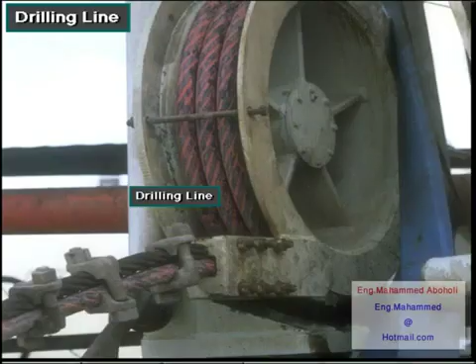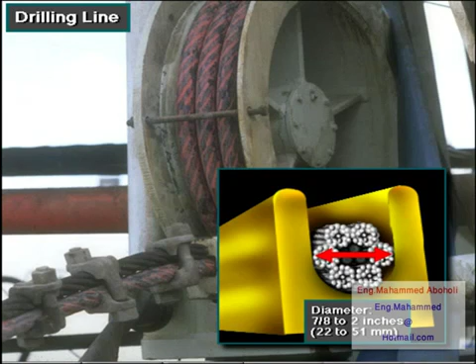Drilling line is high-strength, heavy-duty wire rope. The manufacturer braids several wires together to form the rope. Drilling line comes in diameters ranging from 7/8 of an inch to 2 inches, about 22 to 51 millimeters.

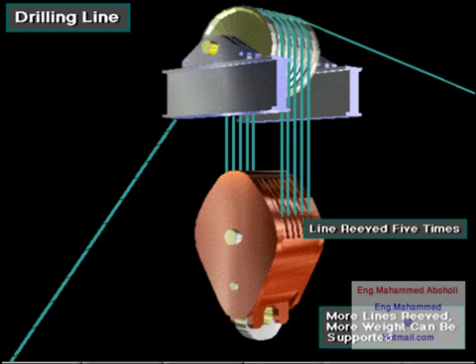Crew members string or reeve drilling line between the crown block and the traveling block. The more lines they reeve, the more weight the system can support. Here, for example, they reeve the line 5 times between the blocks, so that 10 lines support the traveling block.

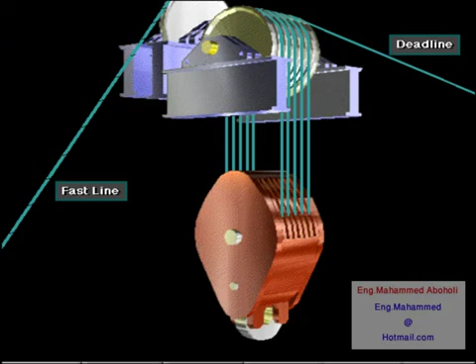Here's the crown block and traveling block strung together by drilling line. Note how the traveling block goes up and down as the driller takes in or lets out drilling line. The dead line is drilling line that runs to the dead line anchor. The fast line is drilling line that runs to the drawworks.

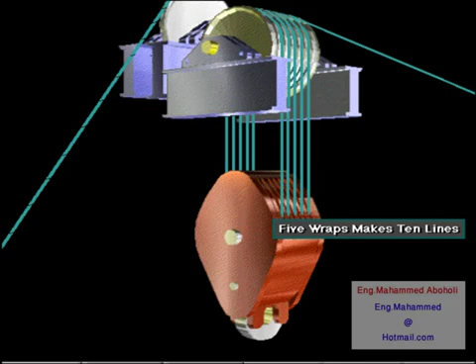Notice the 5 wraps of drilling line between the crown and the traveling block. 5 wraps makes for 10 lines. 10 lines can lift 10 times the weight of a single line. Also notice that the crown block has one more sheave than the traveling block. This extra sheave is for the fast line.

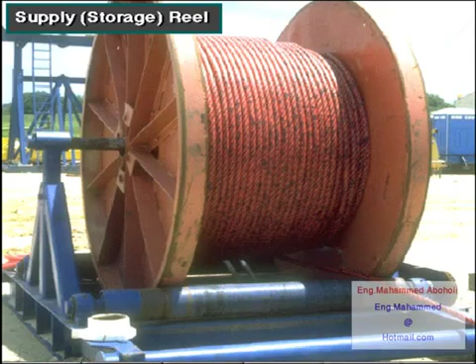Drilling line comes to the rig on a large supply reel. Normally, crew members string the needed amount of line through the traveling and crown blocks and onto the drawworks. Then, they keep the extra line on this supply reel. The reason they keep the extra line is for a slip and cut program.

As the driller raises and lowers the traveling block and its associated loads, the drilling line wears. It tends to wear more where it passes over the traveling block sheaves and the crown block sheaves. The line has to bend around the sheaves, and this puts extra stress on it.

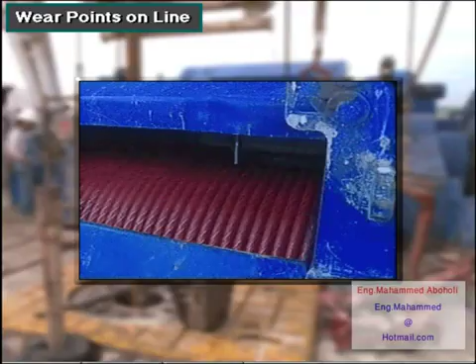The line also wears more where it reaches the end of the drawworks drum. It has to reverse direction here and start back the other way on the drum. This direction change puts extra stress on the line.

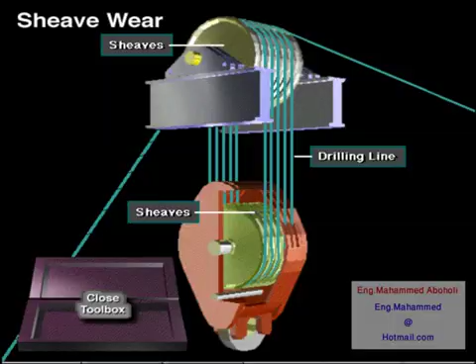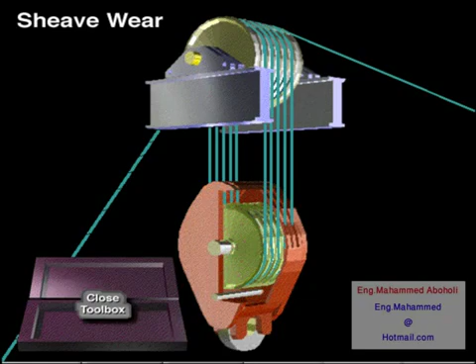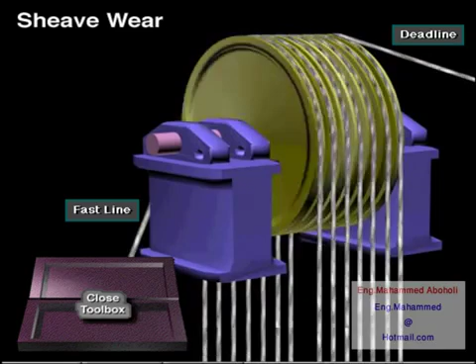Not only does the drilling line wear, but the sheaves do also. One thing that the crew does to prolong the life of the sheaves is to rotate the traveling block 180 degrees. During operation, each sheave moves at a different speed. The one closest to the fast line moves the fastest, and the one closest to the dead line moves the slowest. Since the faster-moving sheaves wear quicker, the wear can be distributed evenly among the sheaves by rotating the traveling block periodically. This is often done between wells.

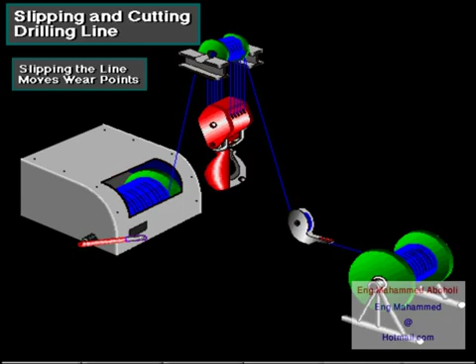To distribute the wear on the drilling line, the crew slips the line a predetermined amount. Slipping the line moves the wear points on the line. To slip the line, crew members lower the traveling block to the rig floor. They then rig up a special hang line from the crown beam to the top of the traveling block. The hang line keeps the block from moving.

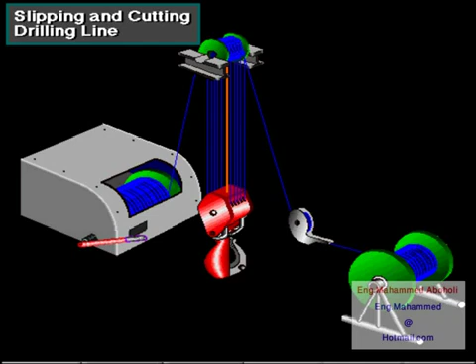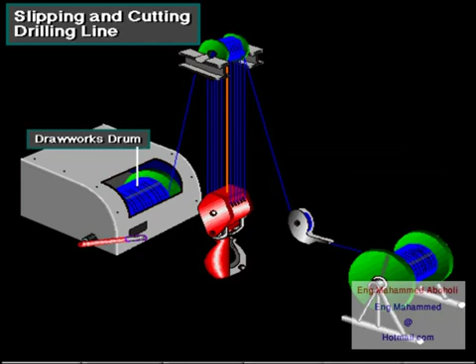With the block unable to move, they unclamp the drilling line at the dead line anchor. The driller then uses the drawworks to pull new line off the supply reel. The line slips through the dead line anchor and stationary traveling block. The worn line reels onto the drawworks drum. To keep too much line from accumulating on the drum, crew members cut off the end of the worn fast line and discard it.

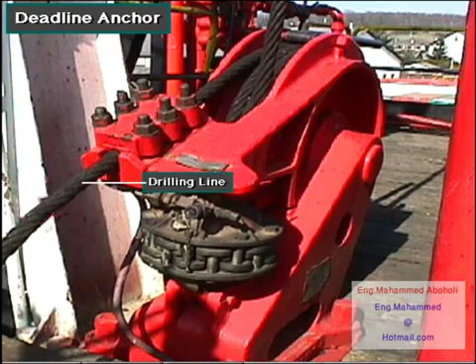This is the dead line anchor. It firmly secures the drilling line and keeps it from moving. Drilling line comes off the supply reel and loops several times around the anchor. The rig crew then firmly clamps the line to the anchor.

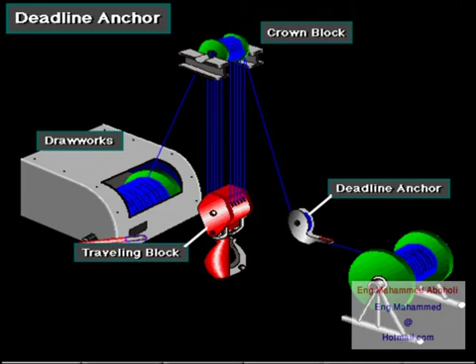The line leaves the anchor, goes through the crown and traveling blocks, and then to the drawworks. Clamping the dead line to the dead line anchor mechanically isolates the drilling line from the supply reel. Because the line is stationary, it is called the dead line.